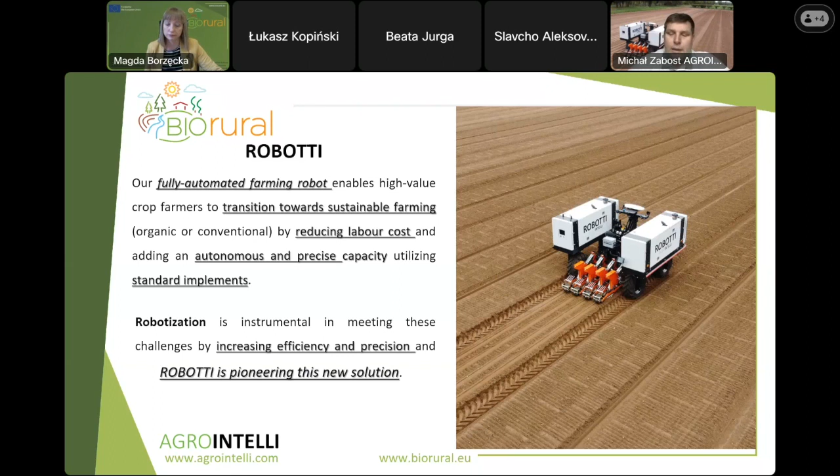Robotti is a real pioneer in this quite new solution of robotizing farming worldwide. Robotti is based on 4 pillars of success. The first one is, of course, precision, because the robot is more precise than a human, and enables precise seeding, weeding, cultivation, chemical plant protection, as well as collecting data from the field, from the crops.

The second pillar is efficiency. Operational time for robots can even be 24/7, 24 hours a day, 7 days a week. One version of Robotti can work up to 60 hours, because the limiting factor is diesel tank capacity, and having a 300 liter diesel tank, Robotti can operate up to 60 hours.

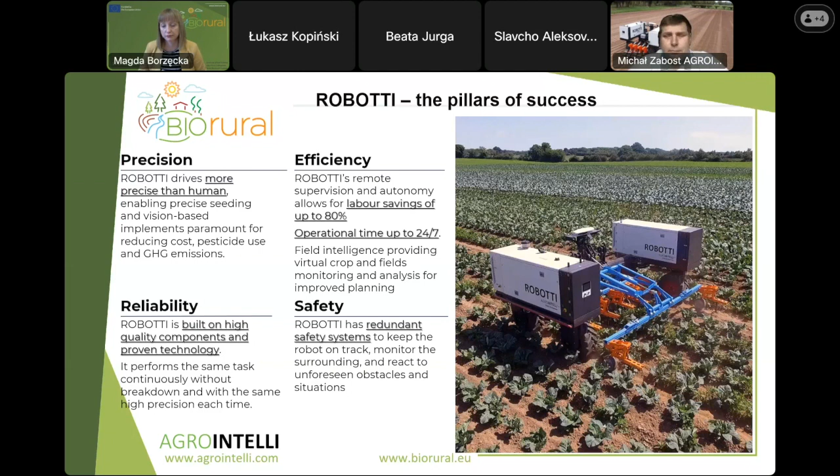Safety is very important for robotizing, and Robotti is based on a redundant safety system. There are several safety systems, I will show it a little bit later. And last but not least is reliability, because we know from practice that there is nothing worse than giving a farmer a great solution and leaving him with this solution alone. So support is also very important and goes into the reliability area.

Several sentences about Robotti's history. It's not a very fresh product, it's over 20 years old, because the first research project started about 2000, and over the following years it was transformed from a simple self-driving field cultivator into Robotti as we know it currently.

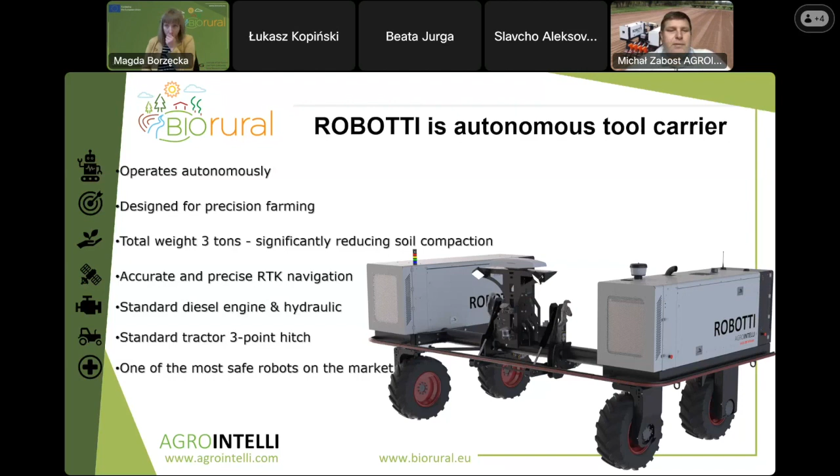It is an autonomous tool carrier. Robotti can operate with no need to involve a human, it operates autonomously. It's designed for precision farming, designed for soil protection due to its weight, about 3 tons, so Robotti can significantly reduce soil compaction. It's designed for accurate and precise work with RTK navigation. It's driven by a standard diesel engine and hydraulic components. It is equipped with a 3-point hitch, a standard tractor hitch. And to be honest, Robotti is one of the safest robots on the market.

What is important for the user, for the farmer, is that Robotti can work with existing equipment on the farm. First of all, we can customize Robotti's working width, choosing between 1.8 meters up to 3.65 meters. It's so far not adjustable, but if we have a tractor, the working width of the tractor is also not adjustable. But because Robotti works with a 3-point hitch like a tractor, we can mount typical farmer's equipment on it, and finally some tools should be adjusted for optimal usage with Robotti to use its full capacity.

What is the main way we offer Robotti to farmers? Robotti can solve the biggest problems for farmers nowadays. The first, of course, is the lack of labor, even unskilled, because skilled workers are very valuable and cost a lot of money. But generally, lack of labor is the first problem we can solve with Robotti, for some uniform and repetitive work we must repeat on the fields, for example weeding, some spraying, etc.

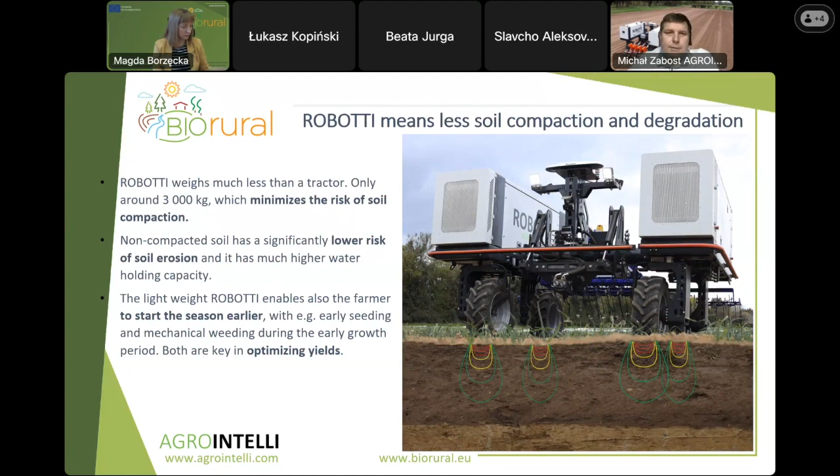I repeat once again, Robotti is compatible with standard farmers implements existing in the farm. We can use seeders, weeders, sprayers, transplanters, etc. It's a big plus for such a versatile tool carrier autonomous platform.

Security and safety - we have 7 systems here. First is GPS-based virtual fencing. We have a 3D laser scanner, LiDAR, and a pressure-sensitive bumper - this is the red belt around the robot. We can also stop and start Robotti remotely online from our smartphone, tablet, or laptop.

Very important feature: Robotti can drive only forwards, it will never go back. There are 5 emergency stop buttons, and we will be informed about wheel slip and, for example, getting stuck.

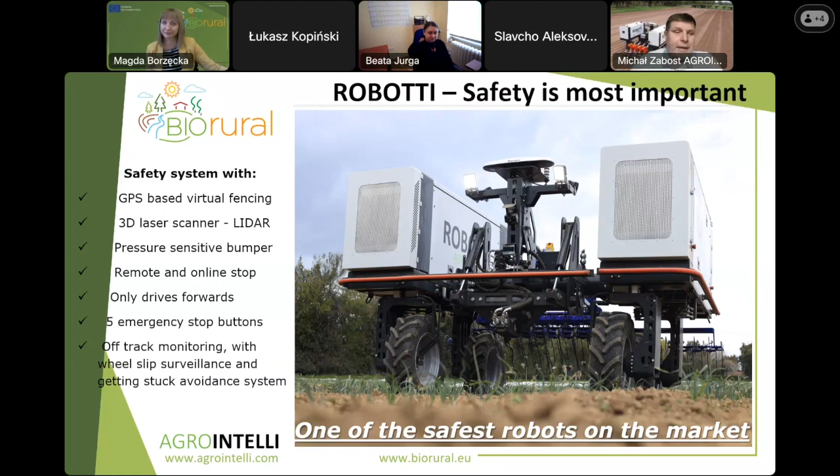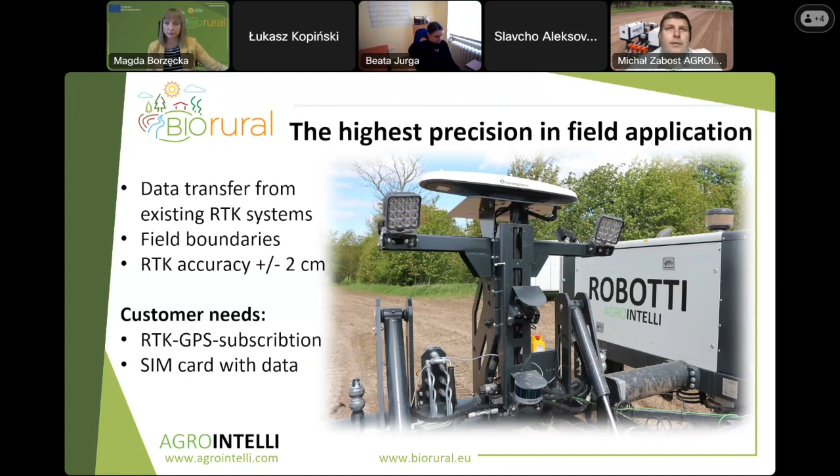The highest precision is possible thanks to the RTK system. Field boundaries are realized by GPS, giving us accuracy of driving plus minus 2 centimeters. Of course we need a SIM card for Robotti because it needs access to internet, which is part of the safety system in this robot.

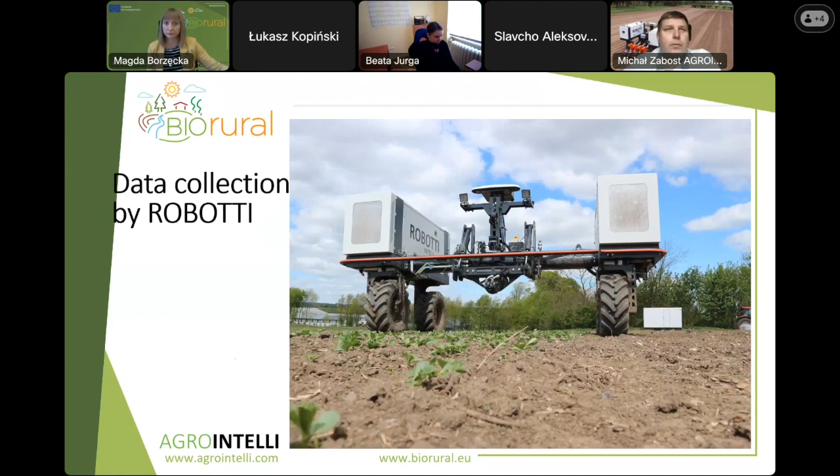What's important from a researcher's and farmer's point of view is that we can collect data. We have several cameras mounted on Robotti, so we can manage the data, manage the safety, see the quality of work done, see if the implement works properly, and everything is done in real-time.

A very interesting solution for farmers and researchers is a small device called the crop eye camera, which allows us to control the conditions of the soil, the situation with weeds, crop growth, and quality of the job made by Robotti and its implement.

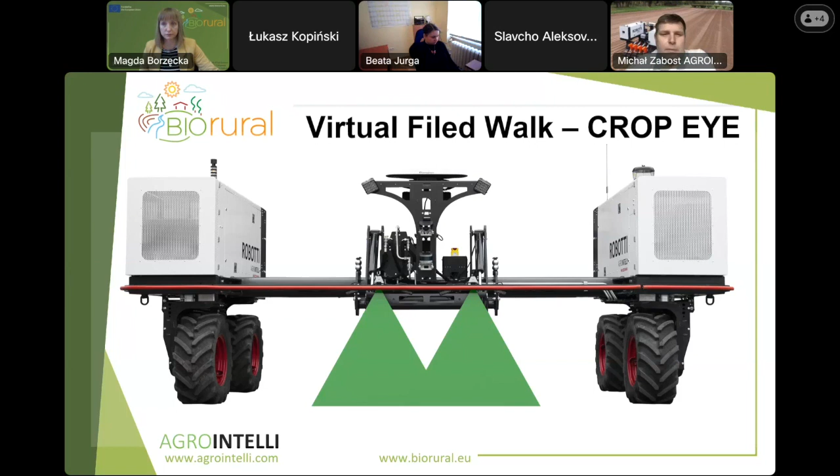Virtual field walk is an application connected to crop eye. We can mount 2 high-resolution optical cameras on the frame of the robot, which make photos at a density we choose. We adjust how many pictures per hectare we want, and this allows Robotti to create a map, for example, for weeding.

The green belts you can see here are the job done by Robotti, and the green dots are the pictures taken in the field, because every picture is geotagged, so we can easily find the exact position of the picture taken from the field.

This is an example of a picture taken by crop eye. We can see many details in the picture, and it's also a very good tool to recognize weed species.

What's more, the system can also recognize weeds - it identifies monocots, dicots, and regular crops, and can differentiate them. In this picture we can see in blue the wheat, the dicots, and in red the monocots. After that, we can draw conclusions about weed species and weed population.

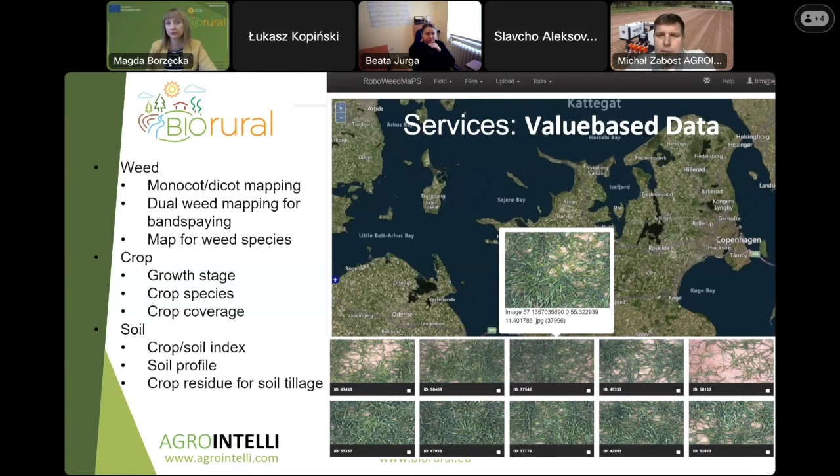Of course, everything is written on the web services. We have access to all the fields where Robotti was working with the crop eye camera. At every moment we can find a position, localization, and the picture, and see what was going on in the field.

Having such a solution, we can also collect data regarding our crop, creating maps and pictures. If farmers work together with an agronomist, there's no need for the agronomist or advisor to go to the field and walk around - it could all be done remotely.

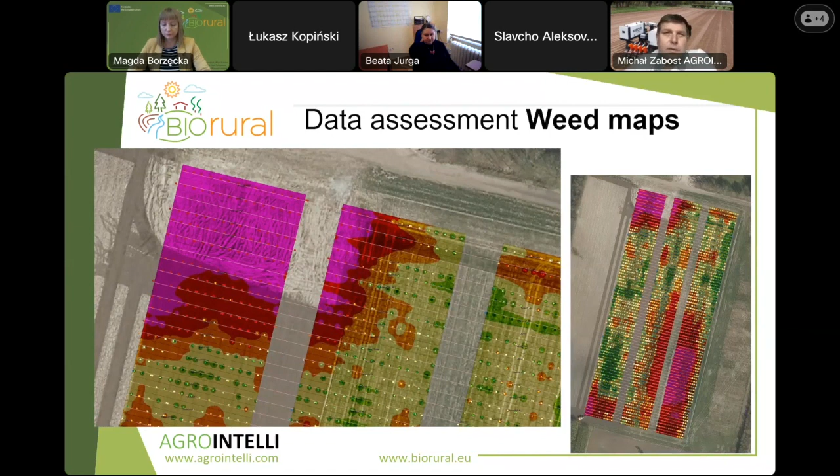Everything we need we can find in the SaaS service. We can create weed maps, for example, like this, covering several fields, and see that problems with weeds occur only in some parts of the field. After that, we can easily prepare a shapefile map - a weed map in shape format - and this map can even be applied to a spraying drone, which uses much less water and fewer chemical substances per hectare.

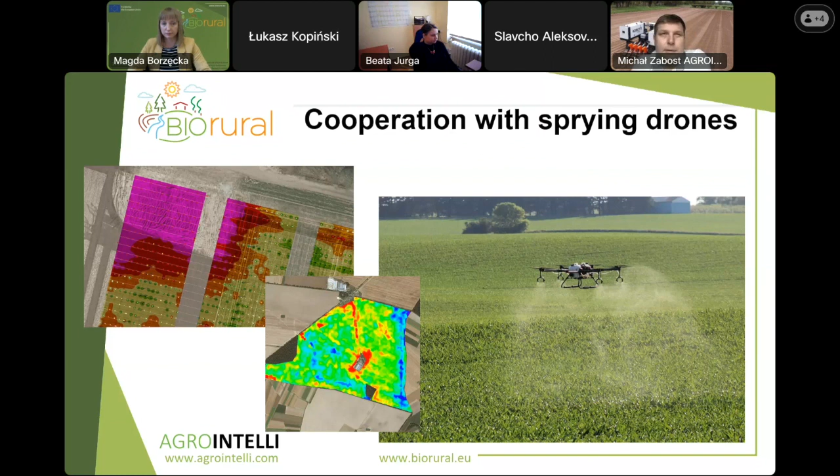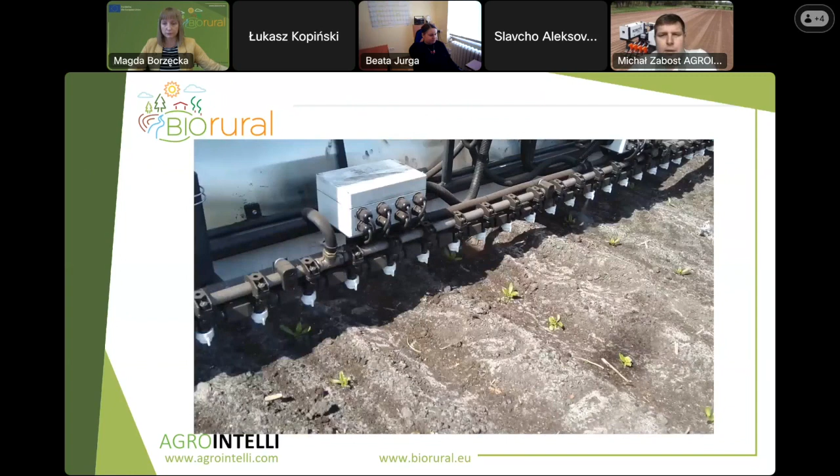If we would like to use Robotti with a spot sprayer, that's also possible. I hope you can hear the sound - the spot sprayer is basing also on the weed map mounted on Robotti.

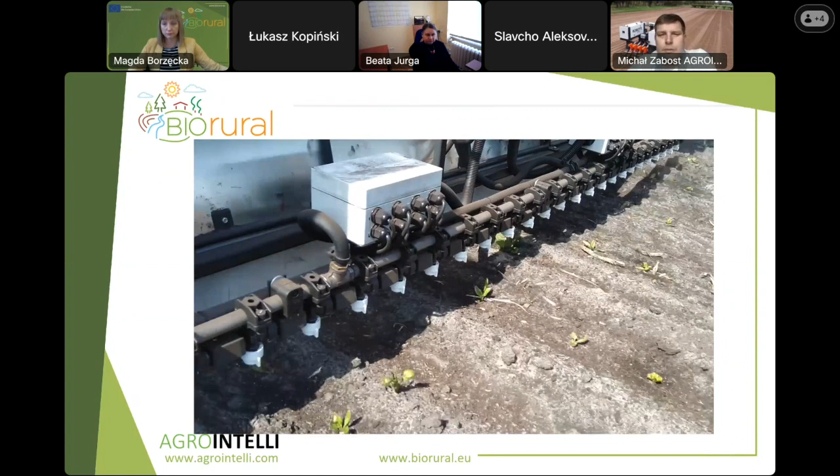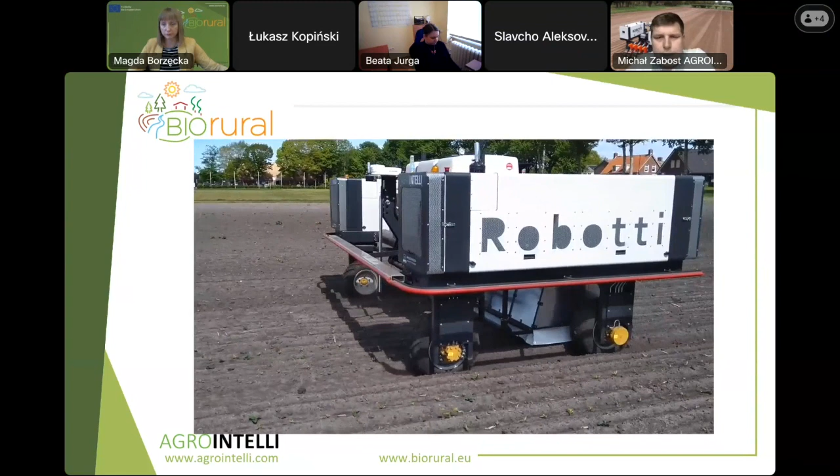This is probably sugar beet, and the main problem in this sugar beet field is potato plants growing after the previous season. Autonomous operation is possible and quite easy if we don't use a spot sprayer, for example because we are an organic farmer leading the farm in so-called ecology.

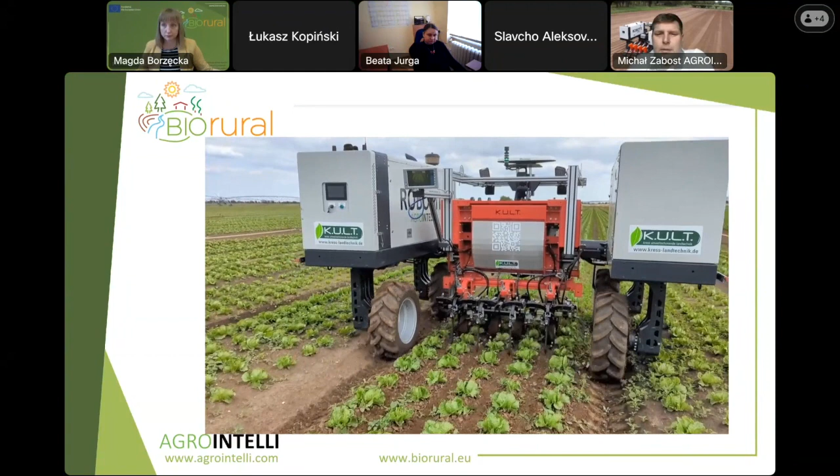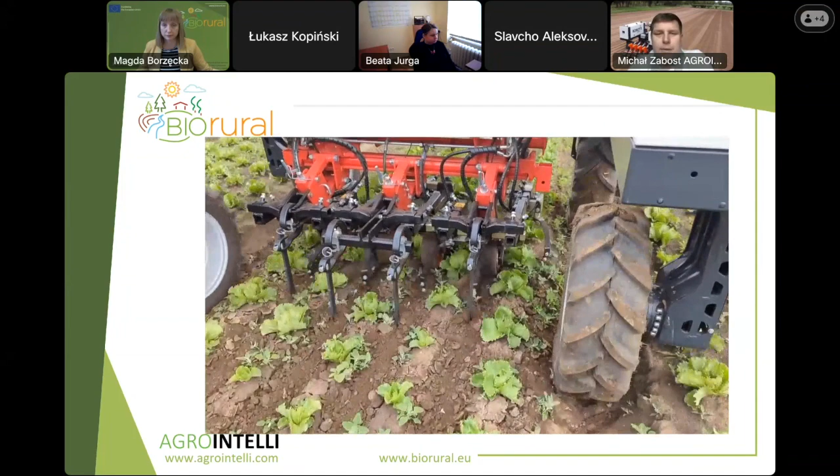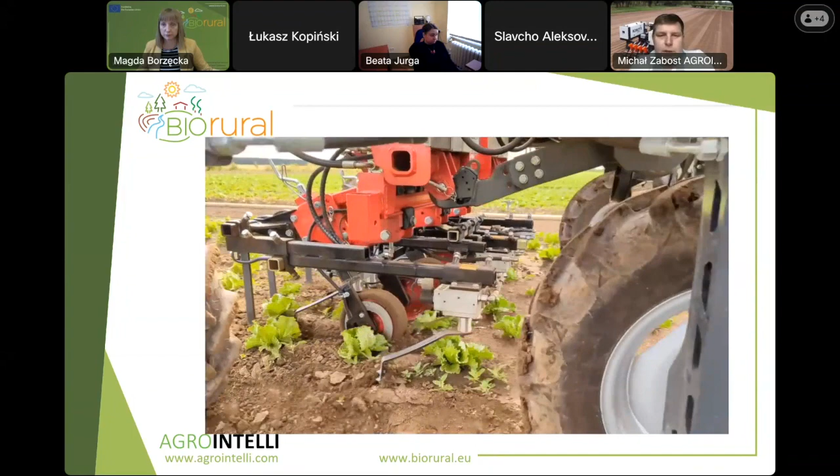We can use a mechanical weeder, also based on Robotti. These are only several examples of implements that could be mounted on Robotti and work autonomously day and night, during weekends, during holidays, and at other times when it's very hard to convince a field worker to come to the field and do hand weeding, for example.

The main pain, the main problem of such a person, will be lack of reliable workforce, but still the main objective will be looking for cost-efficient production.